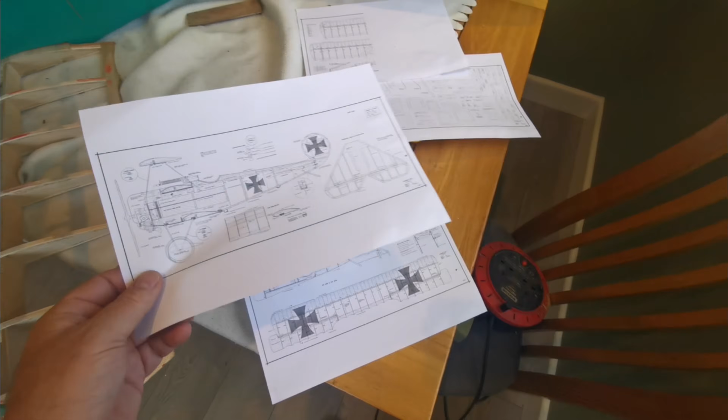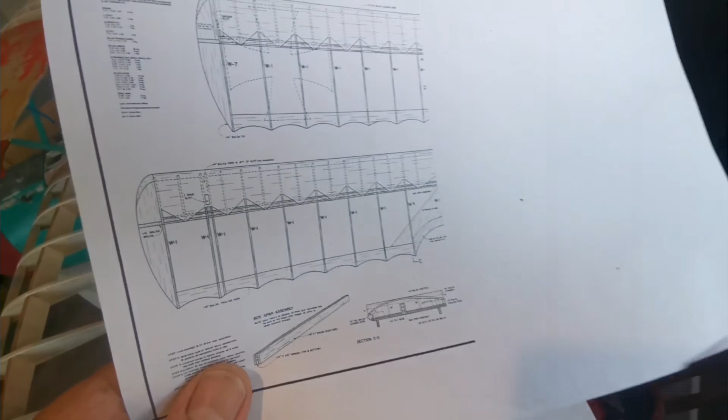Here we go then. I've discovered these plans on Outerzone, and they are built to a scale of 1/4 inch to an inch, so 1/4 scale. And there are many features that are the same, but obviously some that are different. So one that I've just noted, I've only printed half of the page for some reason. This bottom image that I'm showing you now is the middle wing, and you can see the cutout that's been added so that the pilot would get a better view. And I think the addition of that feature onto this part of the model will greatly enhance its appearance. So that's something I'm going to do to that middle wing.

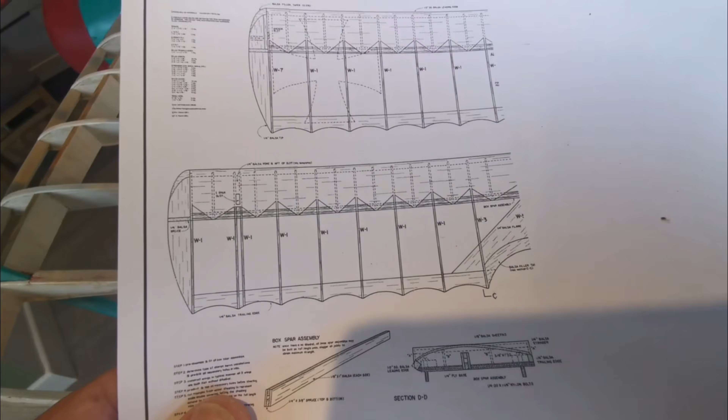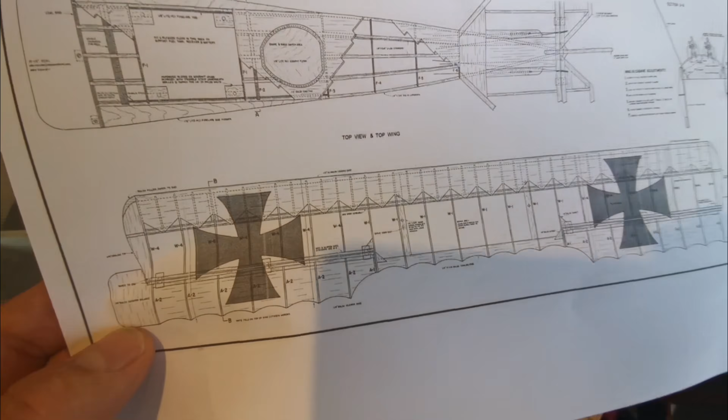The upper wing, I'll show you that, is slightly different in that the ailerons on this drawing, which I'm taking to be a truer representation, are actually bigger, and the step out from the upper wing is more pronounced. On this one, you can see that they don't seem to step out as much and they're not as deep as they are on this image. So when I rebuild the upper wing, because it'll certainly need to be rebuilt, I'm going to change the design slightly.

Now I did say that this was a scaled up version of the Flair Baronet, and I think the problem with that is it's been scaled up in size but not in the structure. No account's been taken of strengthening the structure to take a bigger model. For example, there's a lot of flex in this wing in parts, partly because they've webbed just one side, and for the minimal extra weight of webbing the other side of these spars, you'd get a much more rigid wing. For some reason, it's badly warped here. I think it's more to do with storage actually; parts of the upper wing haven't been packed between the top and the bottom.

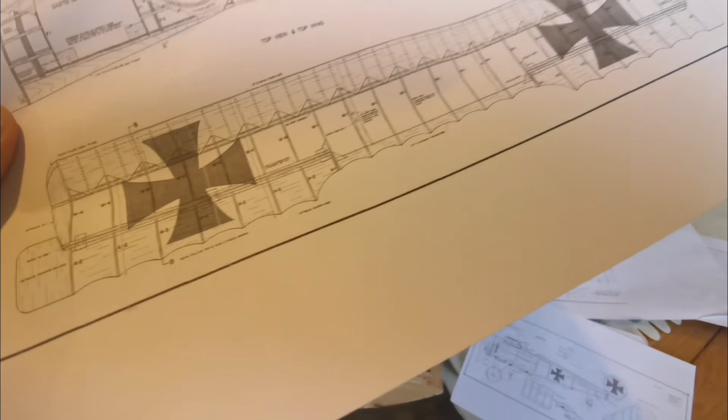So what I intend to do is actually just to build a more scale-like upper wing, perhaps with the capping on the upper edge as well, just to add to the strength, and it'll add a little bit more weight, sure, but it'll make a much stronger wing. So there are two tasks that I'm going to have to tackle.

The fuselage itself, although I haven't started ripping the covering off, the fuselage from an examination from underneath and internally is spot on. And it won't need a lot of work actually to bring that up to scratch. You can see that these control surfaces have seen better days, and this is rather wobbly.

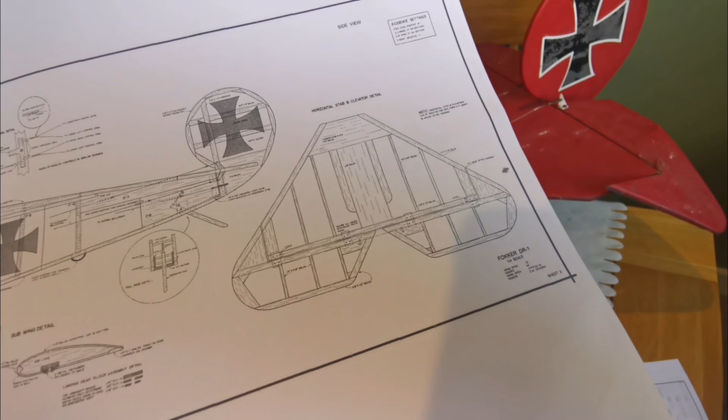This will all be stripped, and I know from just the feel of it that if I actually strengthen it with additional supports as in this drawing, I'll end up with a much stronger tail surface. So it's a long-term project this, but one I'm willing to tackle.

The other thing that I've noticed, these, one of them's broke here, these cabane struts are actually just in wood. Do it that way, you might see them better. They're just in wood. And I'm certain that this model will inevitably flip over onto its back. They're just notorious for it.

And it'll take some time to get it right. And I will flip this model, I'm certain I will. And that's just asking for trouble. So I'm going to replace all of these, because the top wing's got to come off. We'll talk about that in a second.

I'm going to replace these with a wire and wood structure that'll be still bolted to these fixing points, and I'll still retain the Flair approach of having the upper wing and the middle wing tied together. This is how I propose doing it.

So the top wing's going to be scrapped, and that means I can cut out this area here to release this upright, this spar. That'll remain on the middle wing. I don't need to take it out of here. I'm happy with the middle wing's flat, but I can still pin it to the board when I'm covering it, more of that in a second, and leave these hanging over the edge of the board.